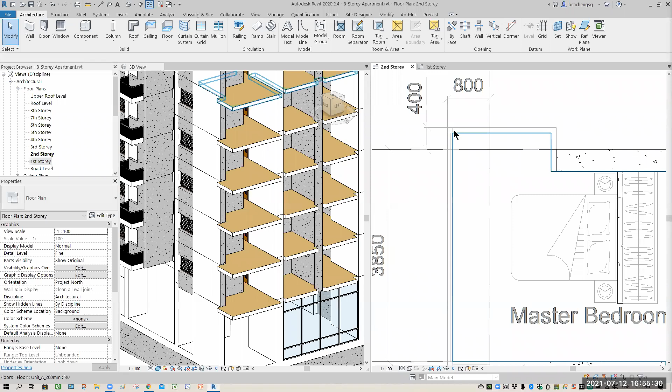So from there, at least it should not be rusty. And you look at the corner - all this is your main support.

Now this piece here, I built it in a way it can actually be a metal cladding or it can be a concrete wall. So it depends, I don't know. So I randomly put it up first just to conceal. It can actually be a steel, so-called aluminum frame, that's mounted onto your concrete wall.

So it acts as a support. It can be that also. So this is actually kind of a C shape, right?

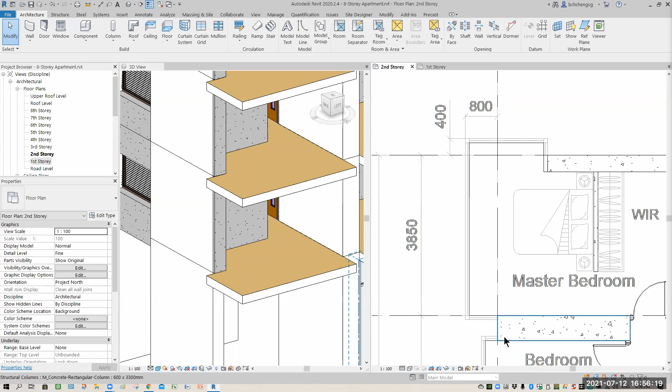So how to design this? See how I do it. Very interesting, huh? Now first of all, we have another curtain wall utilized here.

So sometimes try to design something different because curtain wall can keep repeating. One thing - the glaze panel should not overlap. So when you design, you've got to be careful. Okay, so does the joint.

All right, now from here, if I were you, how would you design this? This is actually, if you measure, 100 by 100. Okay, so in between, this is your glass.

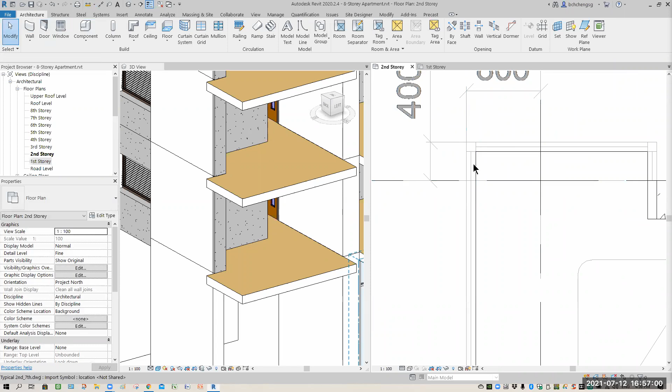This glass, of course, cannot be 6mm. At least a minimum should be 10 or 12, around there. Okay, yeah.

Get your curtain wall, maybe from wall, and how this links to the rest of the level - we can change later on. But meantime, okay, so curtain wall - look for curtain wall below.

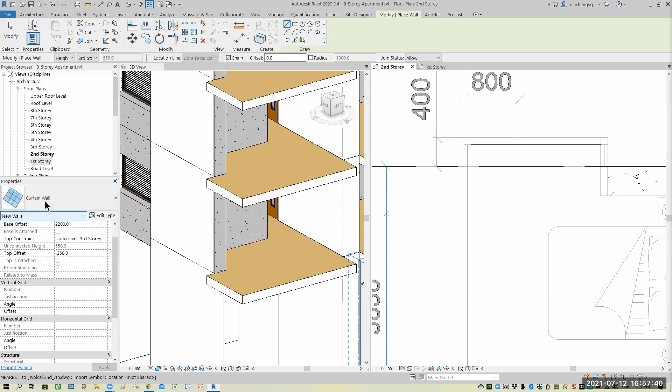Sorry, it's this list here. So I'll select curtain wall, but by default this has been used by my other bedroom. So I wanted to create a new one. We can call this the facade.

Oops, did I select duplicate? Sorry, it should be duplicate. Yeah, so I call this facade.

Okay, facade wall - yeah, you can call it facade wall. Maybe your glass, you put it at 12mm, for instance. Then the panel, the glass curtain panel, you can set it at 100.

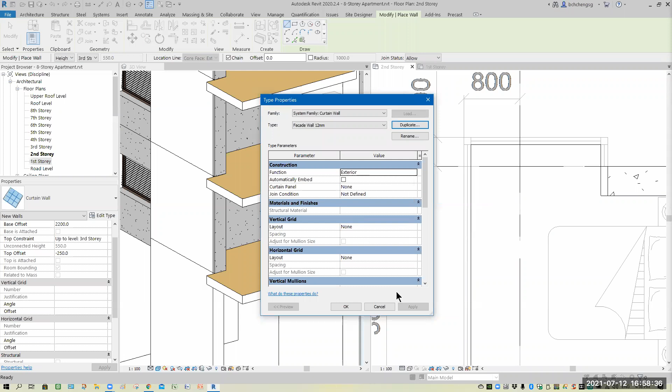Yeah, it's up to you. Maybe, yeah, 100 is better - stronger, rigid support. Okay, so done. All right, pick OK.

Then you just draw according to this. All right, so make sure your chain is on. Now currently you leave it as is, connected to the third story.

We can change later on. You'll connect all the way up to the last level. We'll change that later on, but first of all, get all our settings right.

Once you get this curtain wall done properly, the rest just follows the same - so does the other side here. Yeah, if you don't get this first part done correctly, then the rest is a nightmare. So try to understand, okay?

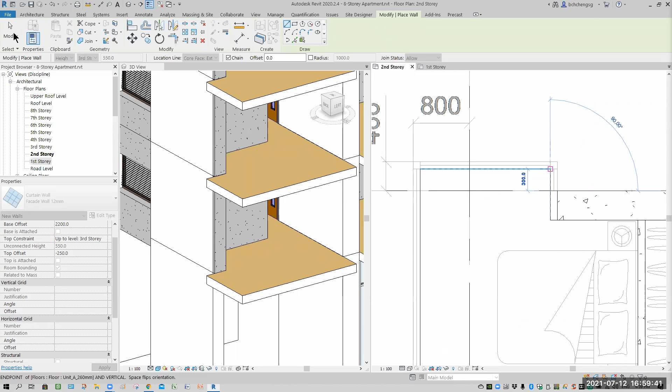If not sure, please ask. So I'm going to select this one. If you want to be safe, or to be sure, connect to the center also - can. Yeah, I mean, hold on first.

Let me just click modify. I should press escape, not modify. Sorry, hopefully, okay, I get my curtain wall back.

So center here, one - see the tracking. If you can't get the center, estimate it, that's fine too. It just needs to be clear. But sometimes it's a bit difficult. See the snapping? Okay, now it can.

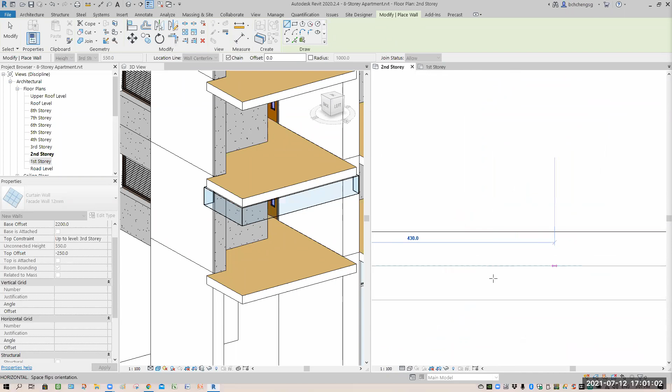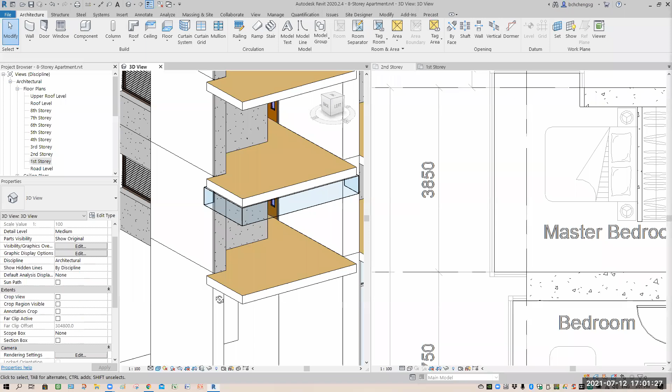Now, when you see this message, of course, it's telling you that it's not falling within the view range. Obviously, you can see from my 3D, this is floating, which is wrong. Okay, so from my 3D point of view... sorry sir, yeah, how do you get your central?

The center is just based on the line. See the line here? Your 2D drawing, you see this line? Yes, then you estimate now. Because you zoom in closer, you can draw quite accurate one. Because Revit also will track the spacing for you.

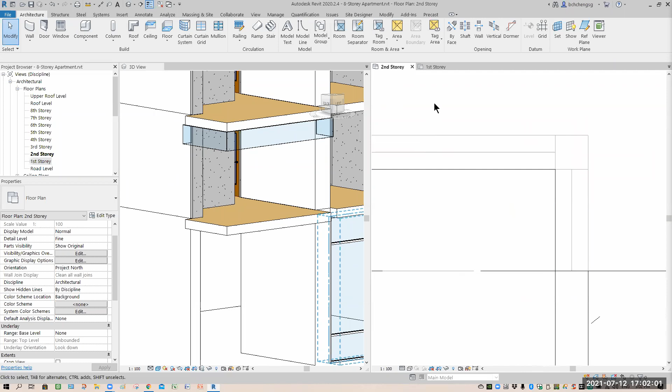So now here I got to select my curtain wall to ensure that the length, all this is properly set up. But because this guy is a C shape, I must make sure I choose the correct component. Make sure all selected correctly.

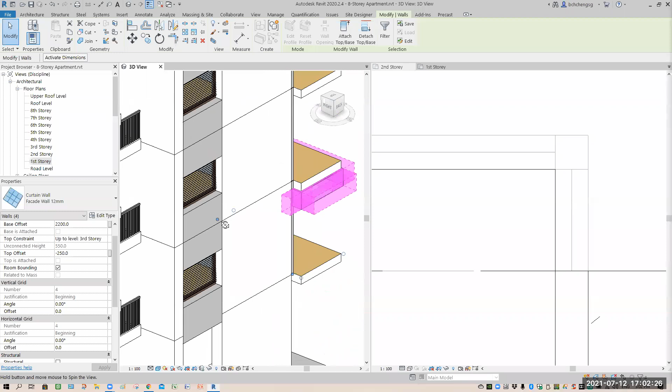Then I'm going to change my height, because the base must be 0. Meantime, if you're not sure, set all this back to 0 first. At least it should be extended properly, so you can see my glass connected. See? Exactly in the center. See?

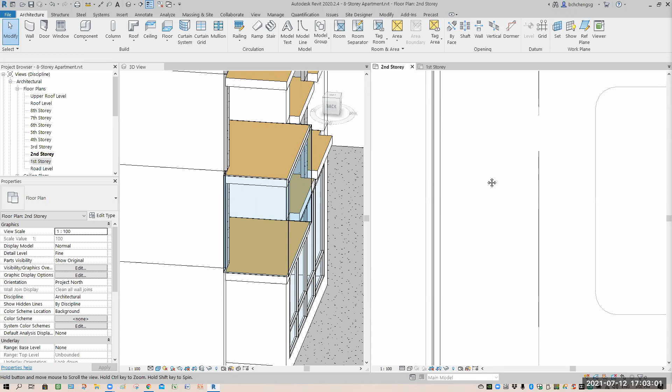Okay, so but again, you see from here, this glass is quite thick. I think they utilize the 20 mm from the above, from this inner wall here. That's what I can see from here.

It's very thick. Okay, so I need to change all the glaze panel, the glass, into thinner. So how to change?

Remember, tap, select the glaze panel. Oops, wrong, huh? Zoom in, tap, only the glass we want. See, glaze. So edit type, see any other size or not.

So original, I'm not going to touch. So I select duplicate. I called it my facade glass.

So let's say I make it 12 mm, should be good because this floor is only 8 story. So pressure wise, 12 mm should be able to withstand that. If you give too thick, the loading of the glass becomes heavy. Normally 12 mm they will have two pieces of 6 mm glass glued together. Oh, so 12 mm.

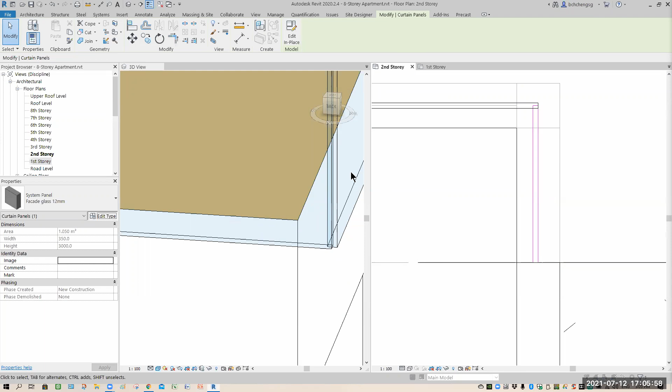All right, it should be -6. Okay, so the other way around, -6. Apply.

Okay, so now I select this also. Tap, tap, oops, tap, tap, select, change the glaze panel to facade glass. Where is it? Facade wall, facade glass. Yeah.

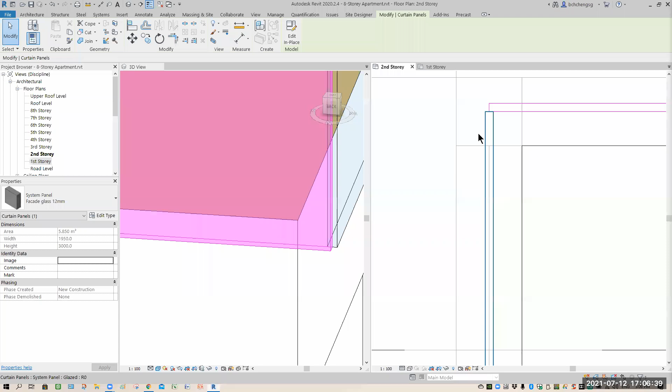Okay, so it should be joined like this. Okay, zoom in. Tap. If can select all together, that would be good.

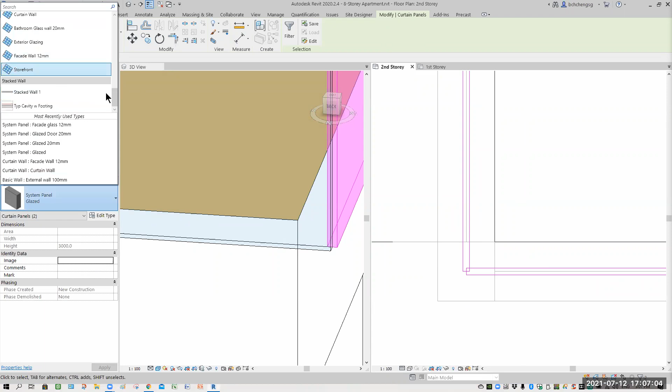All this needs your skill set, huh? Tap. When it's correct, press Ctrl key because you are doing multiple selection. Then set the glaze panel to facade glass. Where are you? Facade glass 12 mm. Yeah, so you can see all connected nicely like this. Yeah, 12 mm.

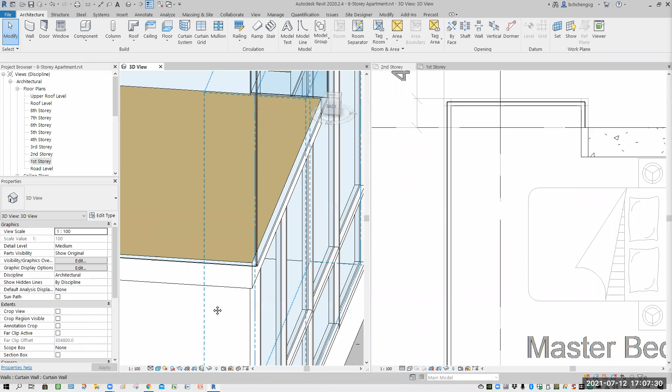Okay, soundproofing also is better. Yes, Diva. All good. Okay, now to cover nicely. All right.

Next is this one going to connect to last level. So I'm going to select all of them.

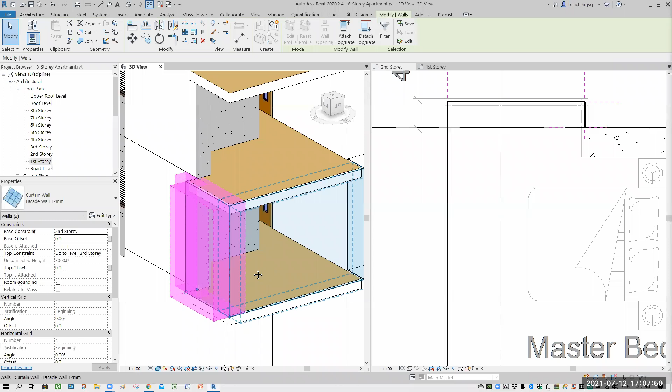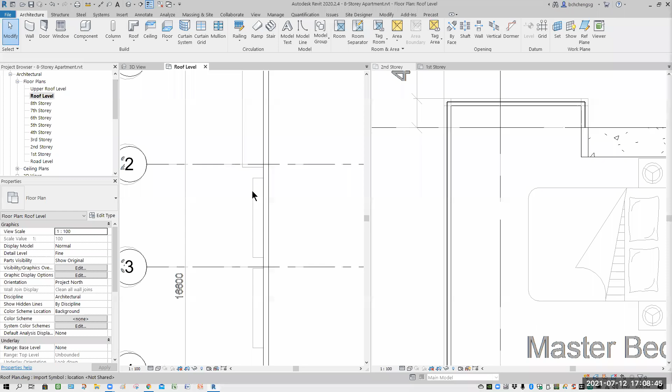Okay, now roof itself, we got to adjust further. Why? Because if you look carefully at the roof level, there's a so-called slab coming out. See or not? This is your roof. Act as a cover. This one also - that's why in my model I did not create anything yet, because I want to see what the shape looks like after I design.

So you can see that for facade, you don't build piece by piece. Why? Because the in-between connection is not accurate. This is one thing you guys need to take note.

Oh, going to be heavy rain already.

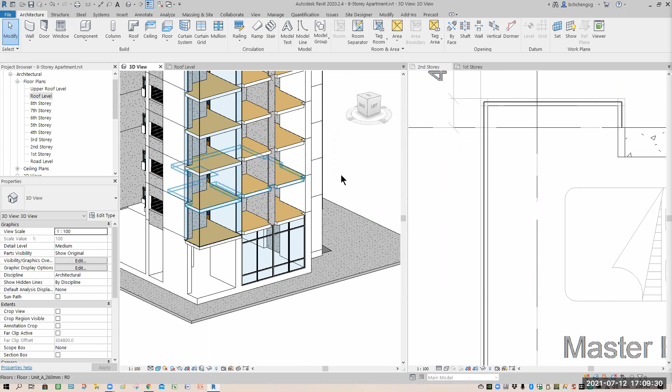Alright, so understand this. When you get the shape design done, the plan we seldom touch already - it's more towards the 3D, unless here for further adjustment. If not, I try to maximize this view because mostly you'll be seeing this more often. So I focus on this.

Top so far, hold on, come to here. Okay, now how to flush this to touch this? So try on one piece first. This one should be base offset minus 250, I believe.

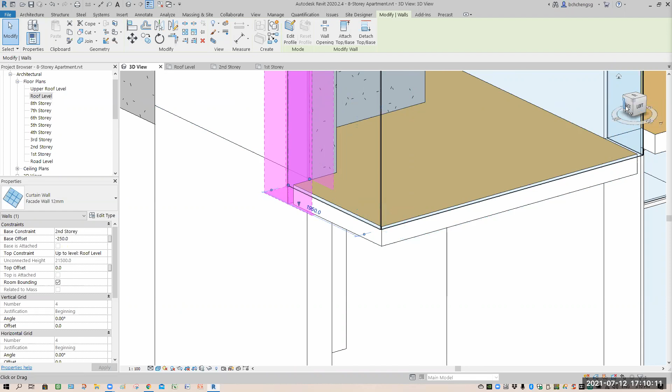How to check whether it touches that? You are in 3D view. Check at the left back view, because it depends on where you're seeing it. Zoom here. Ah, see? Exactly touch. Okay, so once okay, then you can select the rest and change.

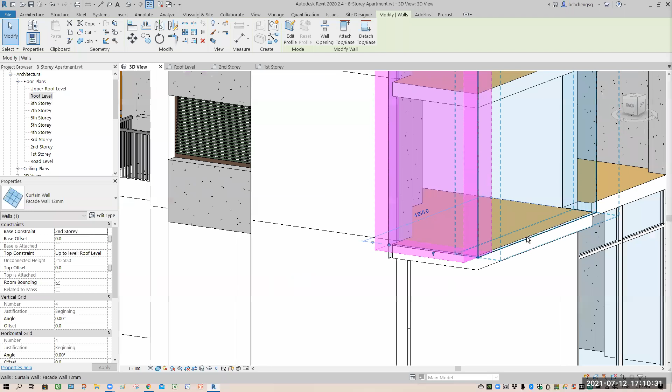Always do on one first if you are not sure. Don't later let people say kalang kabut - you know what kalang kabut means or not?

What is kalang kabut? In Chinese, what is kalang kabut? Don't know. English means don't panic. Chinese is what - kalang kabut - 措手不及, don't know what to do. Alright, I think kalang kabut is Malay.

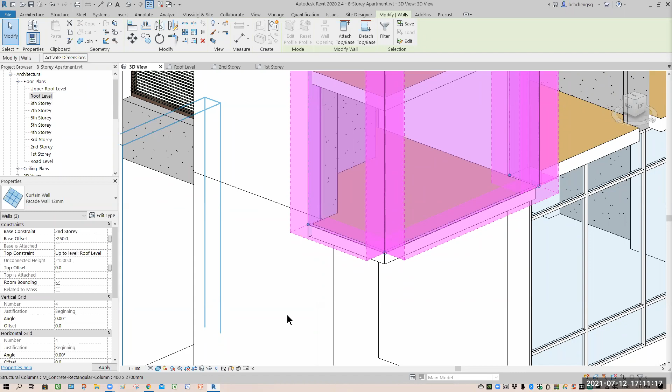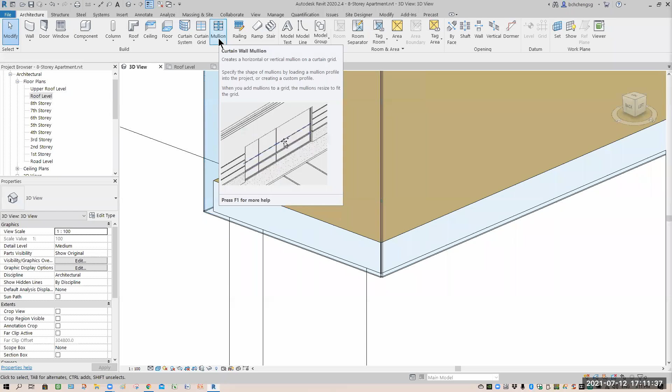Okay, so from here, my glass cover, now my clad, which is my mullion. What should be my mullion size when we cut this? When you apply, for instance, you need to calculate. My mullion must expand down at least by 10mm. Meaning what? Because you do cladding, this must go down by 10mm, it clads inside.

Here must be at least up by 10 to 20mm. Why? Because you don't want things to roll and hit the glass - it shatters. So things roll, you still hit the mullion panel, not the glass. Alright, so let's say I give 20mm, this one 10mm. So this piece of mullion, what should be the thickness? You get what I mean?

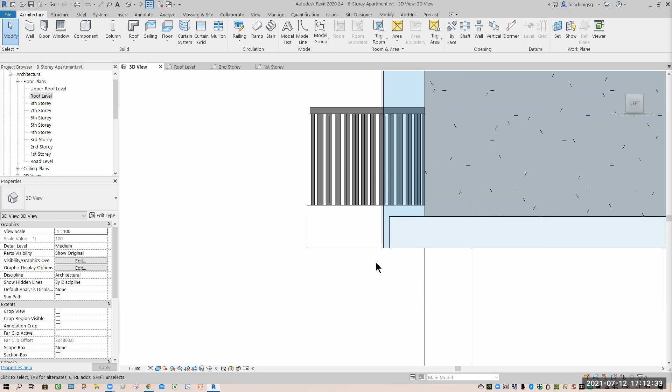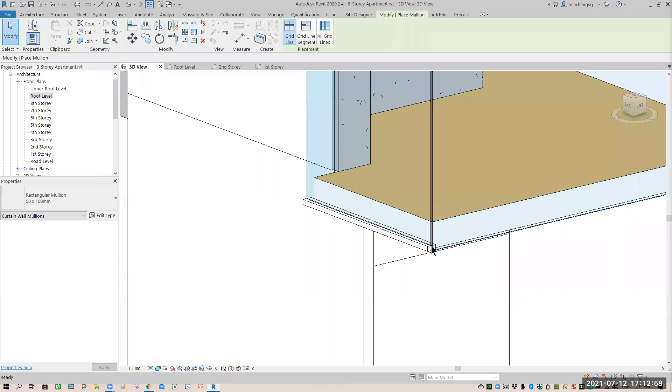So to try it out, that's why I say a lot of planning is required. It's testing how you do customizations or how you plan for this. So I go to my mullion first, piece by piece. Mullion, I have a 50 by 100. Just to insert one, see how this guy looks like. See? So you know that this width of 100 is correct. Then this height is 50.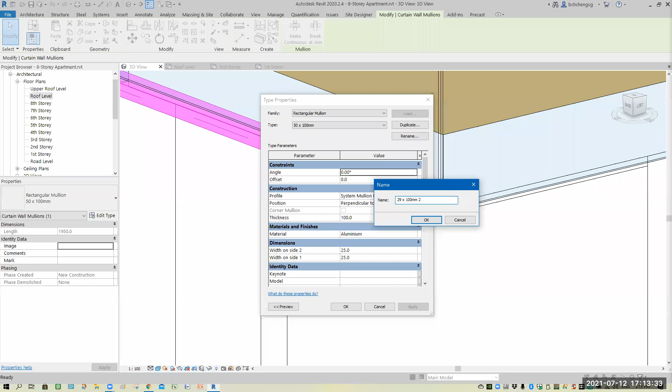So in other words, this particular mullion, you can duplicate. We know that this is 260, right? 260 plus 20 plus 10, so it's what - 290, correct? So I'll duplicate from here, 100 maintained, duplicate. 50 change to 290 - unless you want to round it off to 300. Better still, right? 290 is so awkward. 300 times 100.

Okay, this is one of the pieces. Then remember to change thickness. Alright, 100 means this is 100, this one is 300. So how we're going to sit it? Let's say 150 by 150. But this is to see how the piece and piece connect.

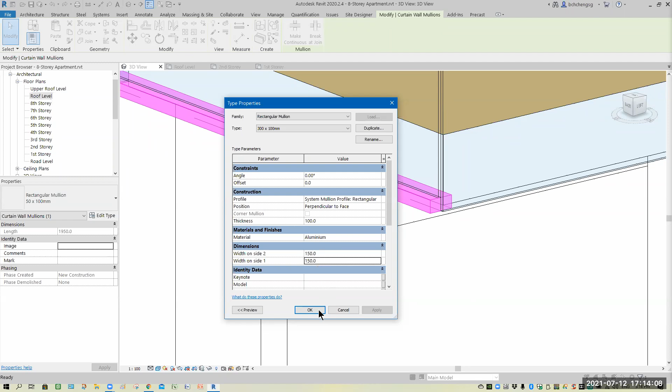All this value you can interchange. Alright, how do you want to design this? So apply - this is how it looks like. But notice that it goes all the way up. It doesn't show me the bottom, this mullion.

So that means my bottom cap is ugly - see that? It goes all the way up. It should drop 10mm downward. So drop 10mm out downward. What should we do? Can we customize this?

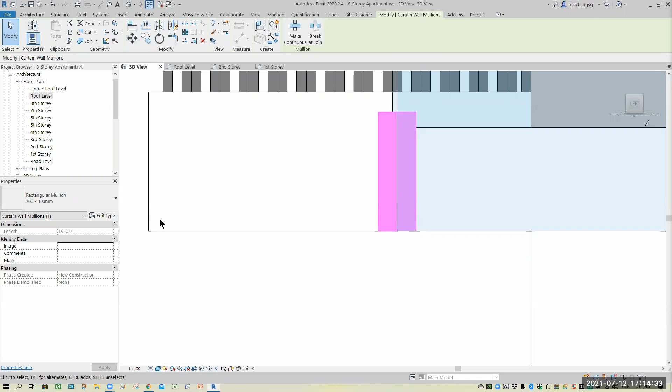Edit type. Let me try, is there any difference? Up, down. So let's say 160, this one 140. I just trial and error, I don't know whether it's correct or not. Any difference? No difference. So it doesn't work that way. Okay, never mind, let me change this back to 150.

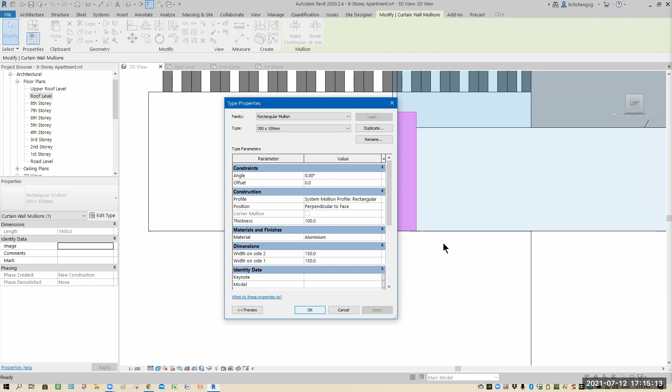And 150, 300. Now, how the curtain wall here works, you can see that it flushes exactly to the length of this. So in other words, how to compensate - select on my glass, a curtain wall, since I know where the error lies.

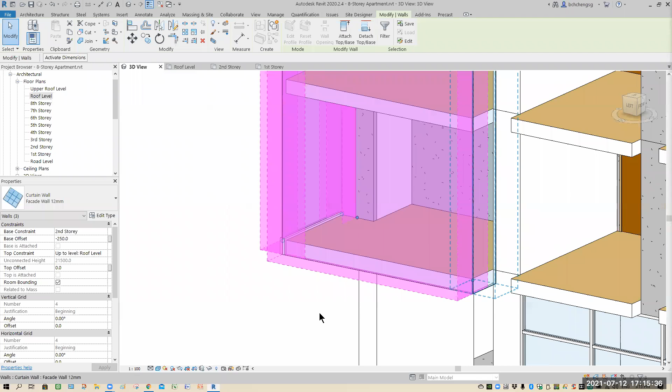Okay, the base offset is minus 260. Now you should see it covers. See now, notice that my PC is a bit slow when things are getting heavy and sharing. See now, it dropped already. See that? So this is 10, this one should be 30.

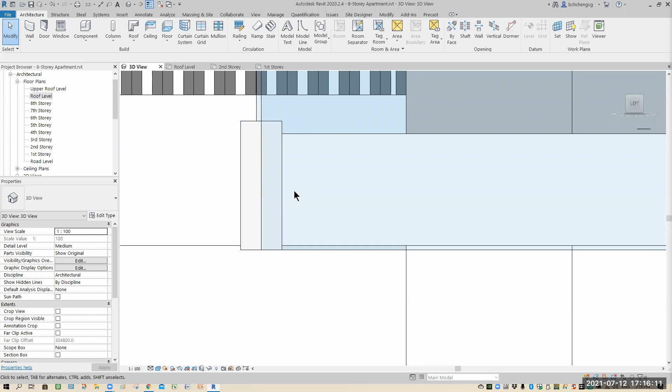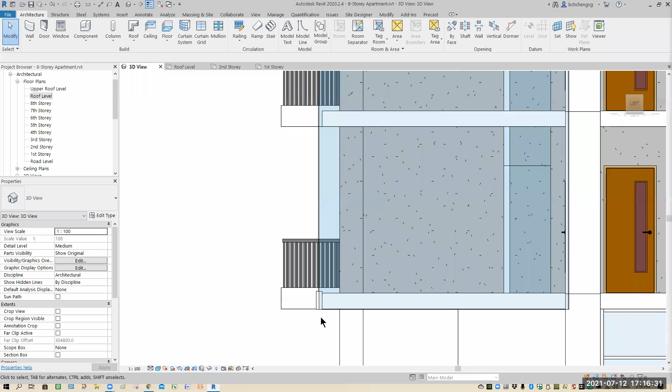So things are set correctly. Remember, to write it down also can. So how to apply this design and this? Now it's a bit different because this is the beginning of the first story. This is in between - so in between from here to here, the design should be identical, not like the first one because it's the first story. So the design will be slightly different.

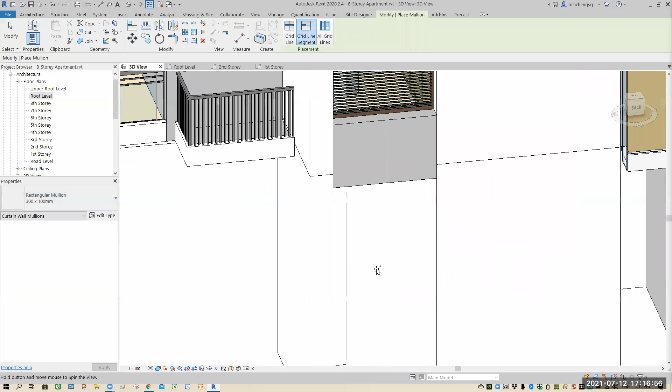So in this case, I will try to add this first, try to get everything correct. So this one I'll change to 300 by 100. You see that they are joined nicely. Okay, select this, they add nicely.

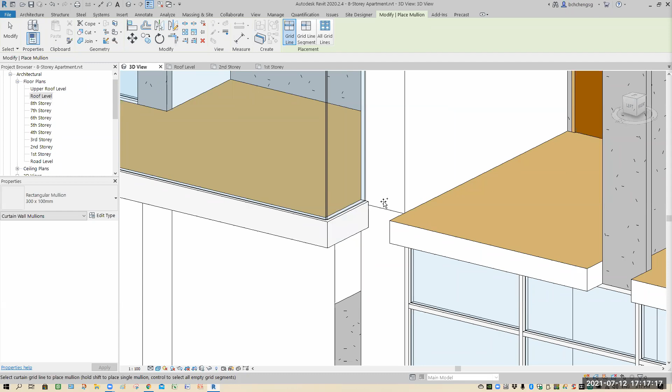Sometimes you're zooming, be careful, very tricky. If my video here is too long, let me know because yeah, okay, another maybe 5-10 minutes, I will stop and re-record again.

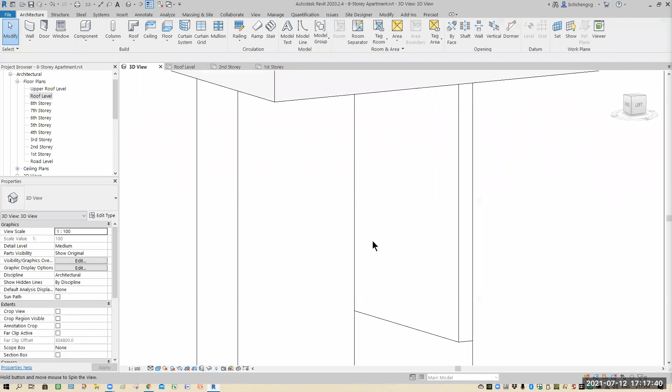So this is the lower part that I'm done. Got it? So you can see it capped nicely. See now, because all these should cover the edges of your concrete. So in other words, since this is a structural floor, this also acts as a supporting element.

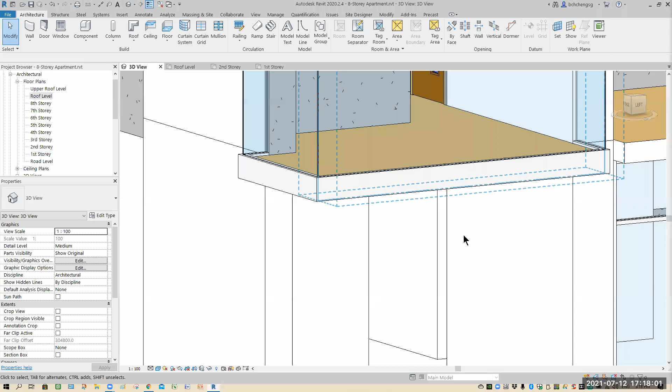All right, questions? So far, for the first mullion I've completed - you can have different designs, but at least the capping, since they are all facade, in between must be metal, definitely, to cap nicely. All right.

Remember, we have a false ceiling - I haven't added the false ceiling yet. Okay, so you must think how you want to adjust. So I don't expect you all to have the same design as mine. All right, try to think how you can adjust it nicely.

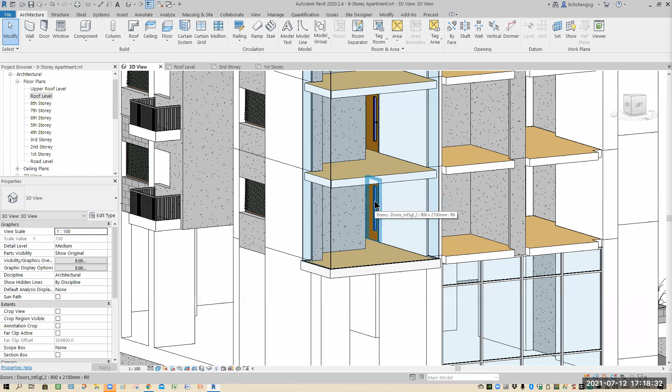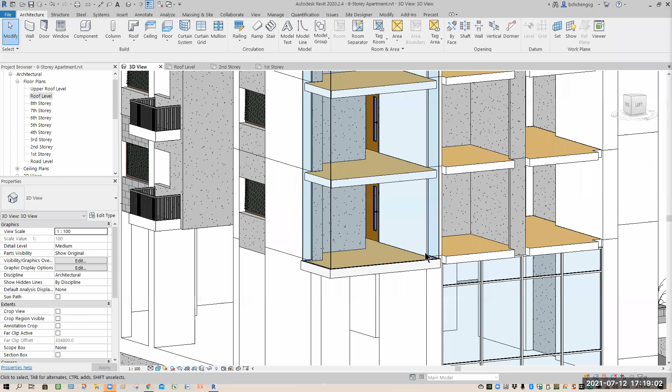I believe in Singapore, everywhere you can Google, go on YouTube and visit some, what do you call it, those condo sites. Take a look, see some condo designs, hey, how they do their glass thing. We are not experts, but understand the connectivity, how they design, how they do the load bearing planning here and there. Of course, you can't straight away say, hey, I like to have one whole big glass here. No, you give way definitely.

But every floor you design must be uniquely different. How do you do the mounting? Of course, in detail, we are letting the facade structure guy do the job. But at least we want something like this in architecture - when you design a model, we show it to them. Okay, this is something we want. Then they must base it on your design, then they do their loading, then yes and no, they will tell you.

Okay? So if you can estimate correctly, or closest to the actual design, you pass already. If not, you tell the, what do you call it, the engineer - I mean, some they do that lah. So the engineer does the calculation. No? Sometimes it could turn out ugly, you don't like it. Then how? Try again, because the design changes.

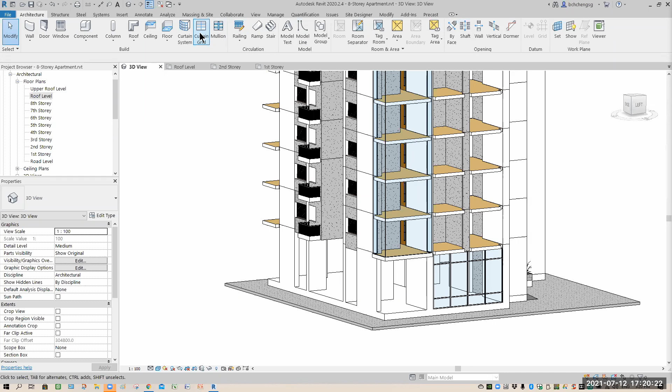Okay, so for me, let's say you use Revit architecture, we try to do something. Yes, we are not experts, but I just want you all to explore the tools. Then you understand better. Similarly, next time you all learn your Revit structure, you'll do the same also. Any questions? If not, temporarily, I will pause the recording.